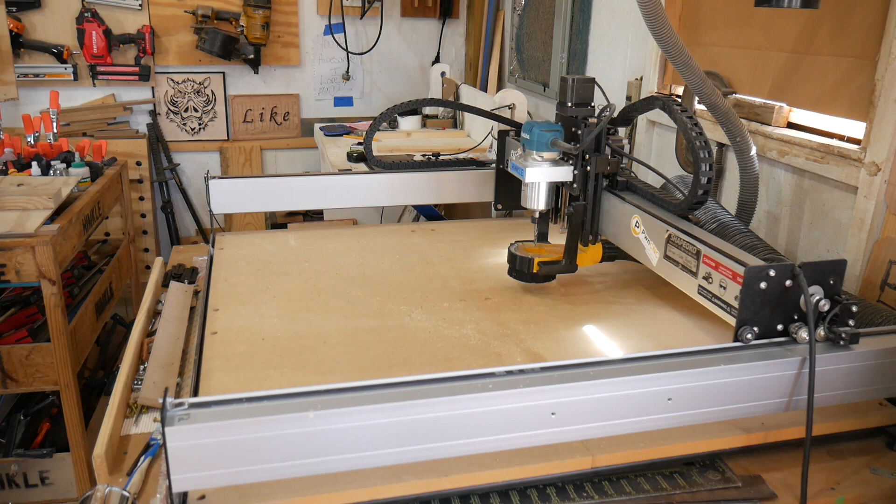Okay, so as you can see, step one is complete. We've got the old one off. Now, there's something that I want to point out here. I don't know if the camera will allow you to see this or not. I hope it will, but right here is a raised portion where I have run a screw through to hold the stock down during carves. You have to remove those.

You can remove them easily with a knife sometimes. Cut them off like so. Maybe take a sander to it. You cannot have any of those little dimples sticking up like that, or it will mess up the replacement of your board. Everything will be cattywampus, and we don't want that. So next step is to go through and make sure that we have no raised portions anywhere on this. I guess we'd call this a primary wasteboard. The one on the top we would call a secondary. Maybe this would be secondary, the one on the top would be primary. Regardless, remove those dimples.

All the nubs are gone now. It's nice and smooth. And one thing I should have mentioned in the beginning, for safety's sake, remove the power from your CNC. You'd hate to have that router come on while you're working for some strange reason. Some of you all have things hooked into your computer where it turns the router on and off. We don't want that thing coming on inadvertently while you got your hands under here doing things. So for safety's sake, remove the power. Let's continue.

Flipping it over so that the feathers are facing the right way.

So here's where the magic happens. We go to the local hardware store and we get ourselves some Johnnie bolts. These are toilet flange bolts that work just like T-slot bolts, but we need a T-slot to put them in. So the way we create that T-slot is we take our MDF slabs that we just cut. We're going to put them behind the blade vertically, like so. We're going to adjust the fence over so that the width of the blade is being removed off the back side of your slab.

Now, your T-nut will be underneath the board, like so. Actually, it'll be like this, and that will create the channel that you will use to clamp down your stock with. So the depth of cut on your blade only needs to be this much, but we'll give it just a little bit more so that we know there'll be no binding when we go to slide the T-nut down through. Edge of the threads to the edge of the nut.

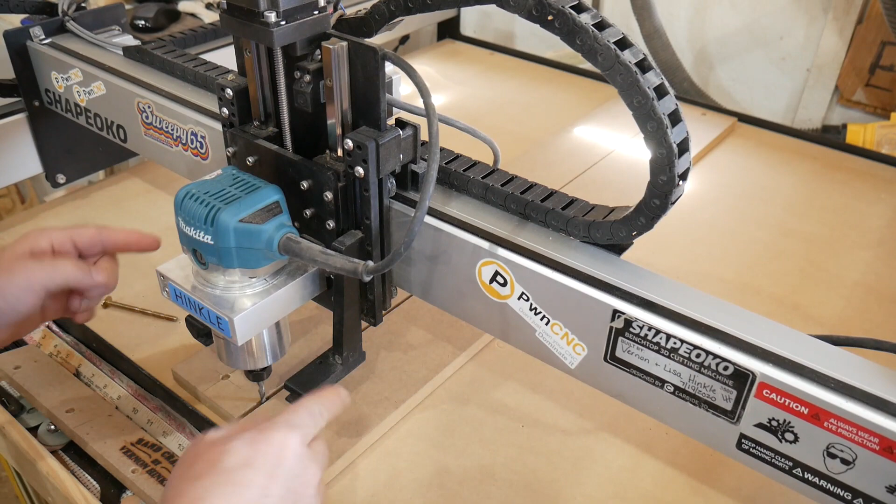We just take each one of these slats now and bump them up against the bit. Closing it on the other end down there, bumping it here, putting in our 1/2 inch spacer, making sure that everything is touching, bumped up against here. We're going to slowly run the machine back, and we're going to keep these guys in place. Realistically, we could put a screw in here to hold it. On each side.

Just like that. We can now remove this out of the way, and we can slowly roll that thing back. And what it's going to do is it's going to create a perfect gap as it rolls through. It's going to push the boards apart to the desired width. And I'm going to go all the way to the back, making sure that I keep this tight up against that bit. And that is as far as the machine will allow. But as you can see, we now have a perfect groove to run your bolt down through. Should put the screws in before you do that though, obviously.

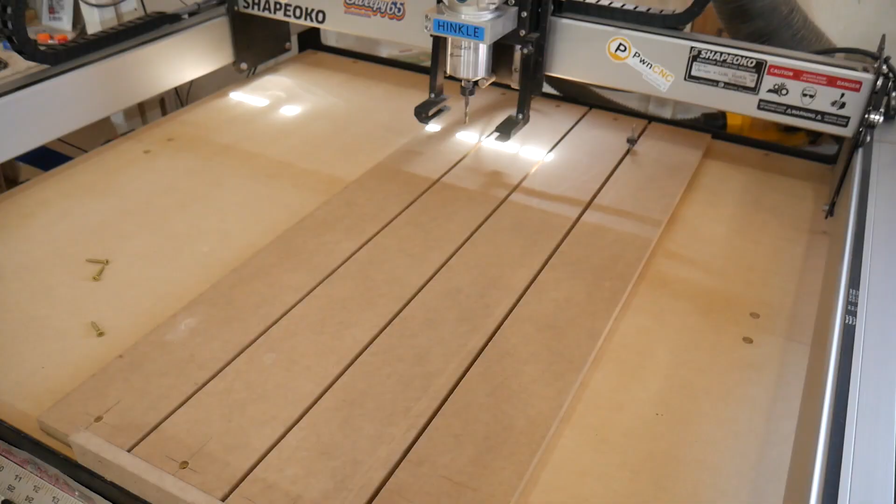Okay, so there's an opportunity here for me to show you a feature within Carveco that'll help you do this. We said that we wanted to put some screw holes in the center of those slats. Let me show you the easiest way to do that with the machine. So open up Carveco, go to New Model, the width of the slats. You measure the slats on your machine. Yours may be different, so you'll need to measure the width. In my case, it's 34. The height is 38. I'm working in inches.

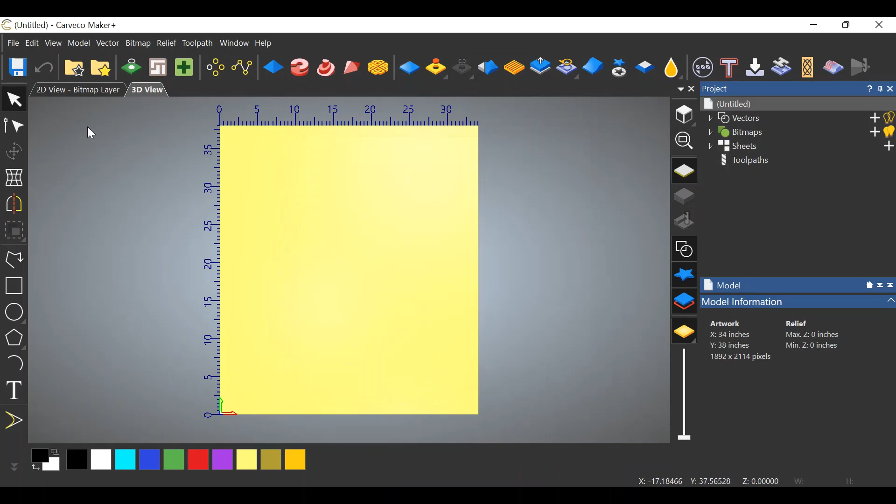I'm putting the origin on the bottom left for now. I'm going to change that to the middle of this carve after I make some measurements. Click OK. And we've got our work area. Now we're going to switch to the 2D view. And the reason that I'm using the origin down here, although we won't be able to do that out in the shop because your wasteboard is greater than the capacity of your machine to reach, is because I want this number scale on the side to be 0 along the bottom for easy peasy lemon squeezy math here in just a moment.

Let's begin with a rectangle. We're going to draw a rectangle that is the size of your slats. The width was 4 inches. The height is 38.

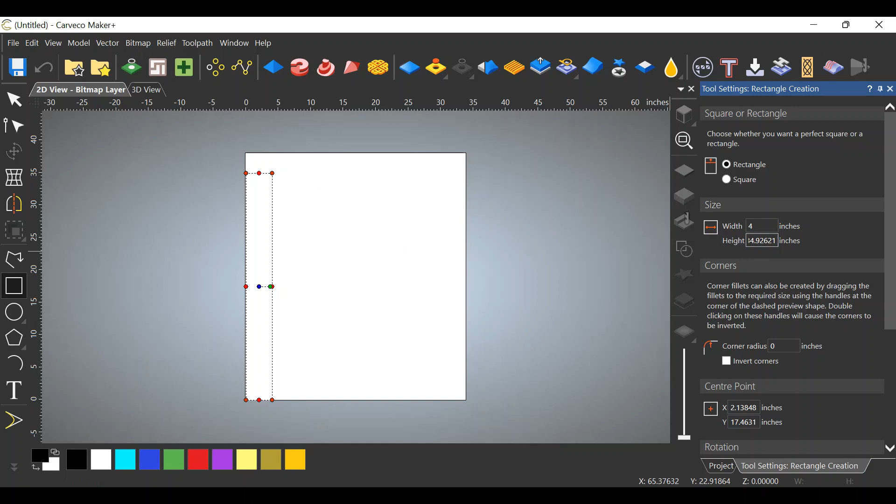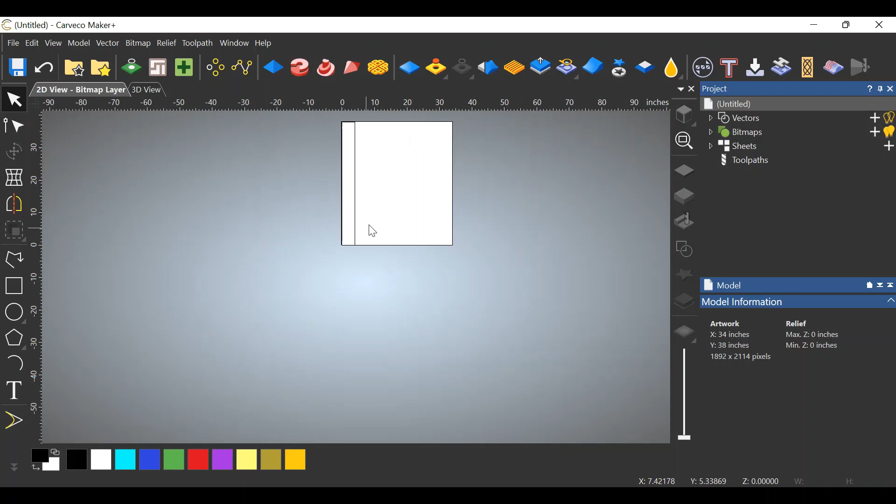Scroll down, click Create. Go back to the arrow, grab the corner of your box, slide it up so that it matches the corner of your work area. When you have it right, the crosshair will appear. As you can see, it changes to a crosshair, release the button. You have it in the right position now. Click off of the rectangle. Let's get him back in the middle so you can see a little bit better what I'm doing here.

Now we're going to put grid lines on here to locate the holes that we want to drill in this piece. The way you do that is to come up into the top bar here, left click and drag down, and you can pull a grid line down. As we move over here to the left, you can see the numbers that I'm going to use to locate this hole. Now we know the first hole was 1 inch off of the bottom. I want the next hole 13 inches further inward.

So if you scroll in just a little bit, you'll see that these numbers are changing. They become more accurate. Don't worry about the box over here. We can get that back. Hover over the grid line, left click, and slide it up until it's over the number you desire. And in this case, I want 13. Scroll back out. As you can see, we're still good. We still have the box over here.

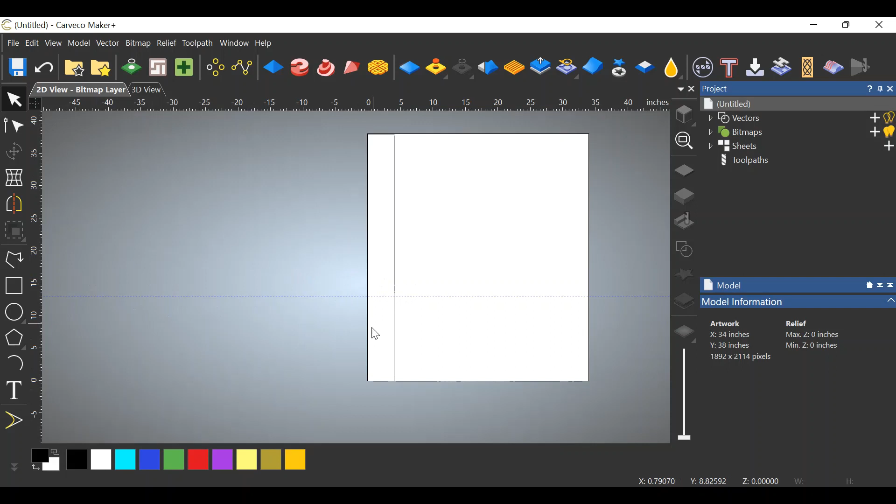Now the next one goes in at 25. So we go to the top, left click, drag down, and we line the grid line up with number 25 on the side. You can zoom in incredibly close, and you can see that we're off, and you can continue to move that grid line to a more precise location, to the 25, scrolling back out, back to the 13, and you can continue that until you are happy with where the location is. All right, I'm good with that.

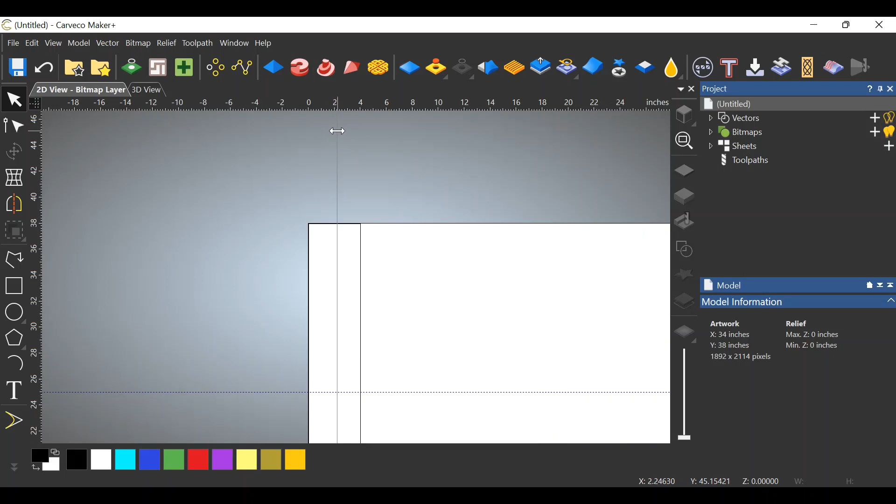Scrolling back over here. Now I need a center line to create a crosshair to the center of this board. So we'll be on the left side. We'll left click, drag the grid over. We know that the board is 4 inches wide. Half of 4 is 2. Scrolling in until I can see the 2 on the top. Again, hovering over the grid, drag to the left until we have it on the 2 and release. Now, as you zoom into your box, you can see that you have the crosshairs to tell you where you want to put your holes.

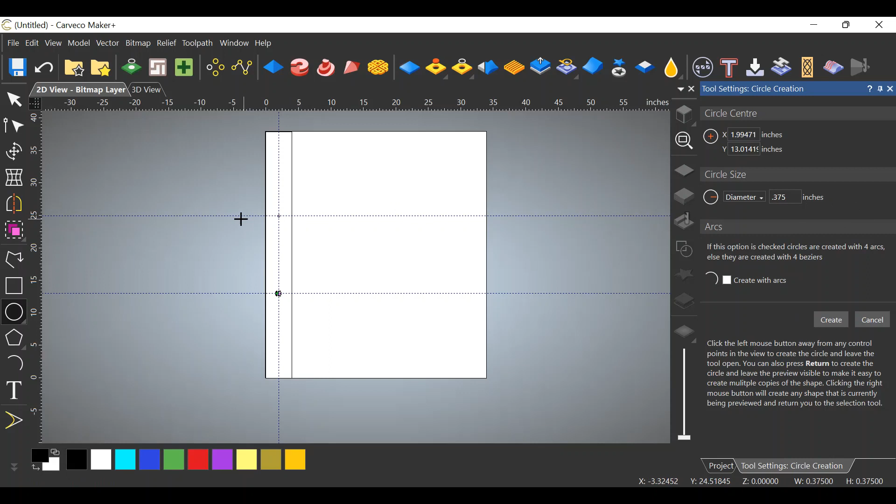Go to the circle tool, hover over the grid lines, left click, drag out. The hole that I need is 3/8 of an inch, so over here in diameter, we're going to change that measurement to 0.375. Click create. We need to do it again right here for the second hole. Change it to 0.375. Click create, and then back over to the arrow tool. And we have our circles. Now we don't need these grid lines any longer, so we can get rid of those by going to View and delete all guidelines. They are now gone.

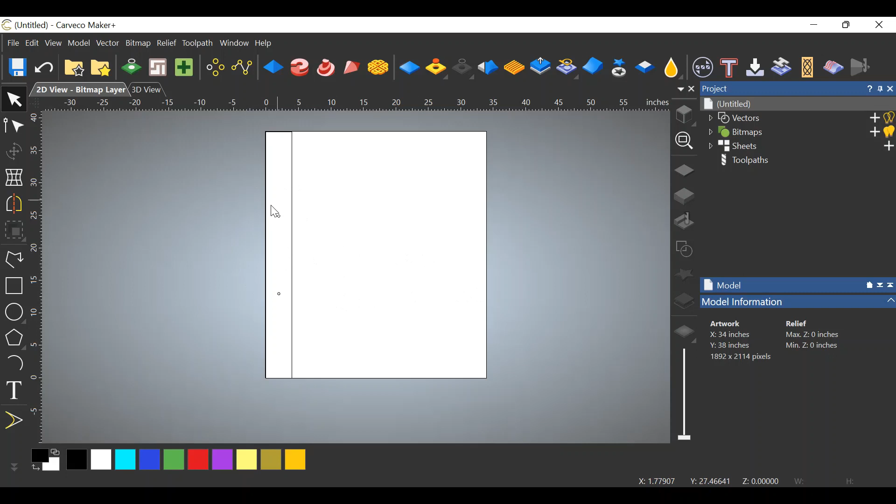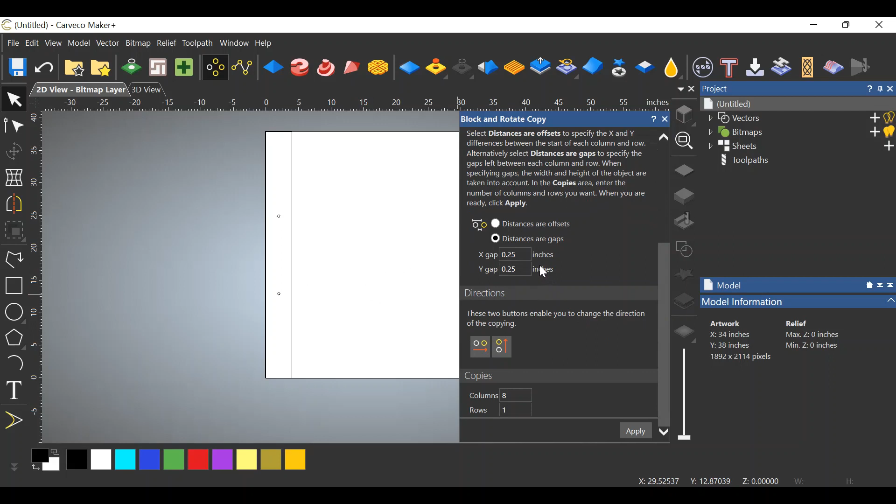So here comes a trick that makes this much easier than redoing that all over again to go across your board. Go up here to these 4 circles, block and rotate copy. Click that. You want to block and copy. Scroll down. You want a gap of 1/4 inch because we spaced those boards 1/4 of an inch apart as they went across the bed of our table. Scrolling down, we want, in my case, 8 columns because I have 8 boards. We only want 1 row. I don't need to double stack or triple stack these. Now I'm going to click apply and you're going to see magic happen.

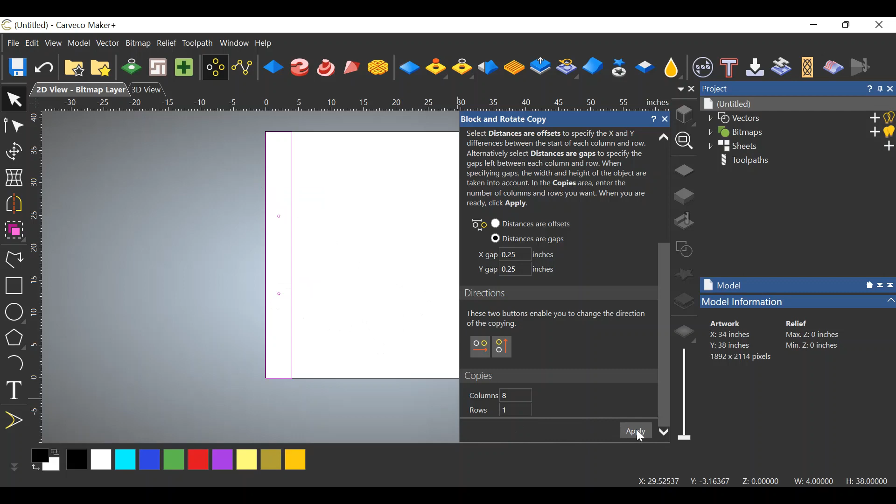You will see magic happen if you select what you want to block and copy. Let's try that again. Now we'll see magic. Close this out. And as you can see, we now have 8 slats with all the holes in the proper orientation. While this is highlighted, hit F9 to ensure that the whole thing is in the middle where it belongs.

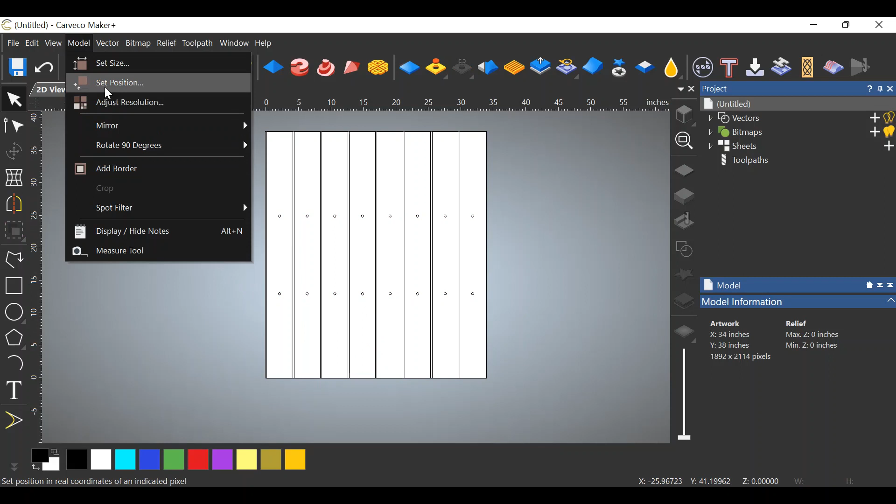We're going to click off of this, and now you want to go to Model, Set Size, and here's where I'm going to change the origin. I want the origin back in the middle. You won't be able to line up your machine here on the bottom left because your router bit will not reach that corner. At least it won't in the case of a Shapeoko. So if we move the origin to the center, click OK. Now the origin is in the middle. How do I prove it? I go to 3D view up here on the top, and I have the origin turned on so I can see that it is there. Let's go back to the 2D view.

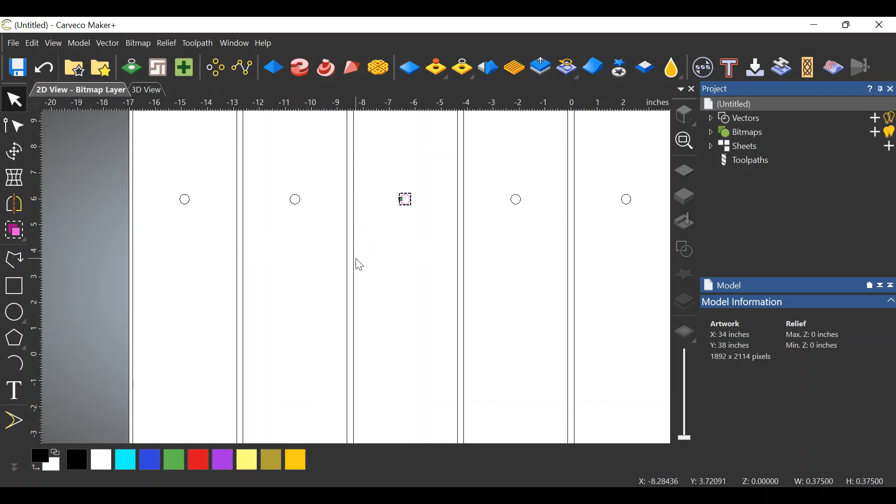Now we've got to go through each of these images and ensure that they are not grouped together. We need these holes to be all grouped together, but we don't want the boxes grouped together. It appears that we are good because as I click on these, I don't see the boxes lighting up, so we're in good shape there.

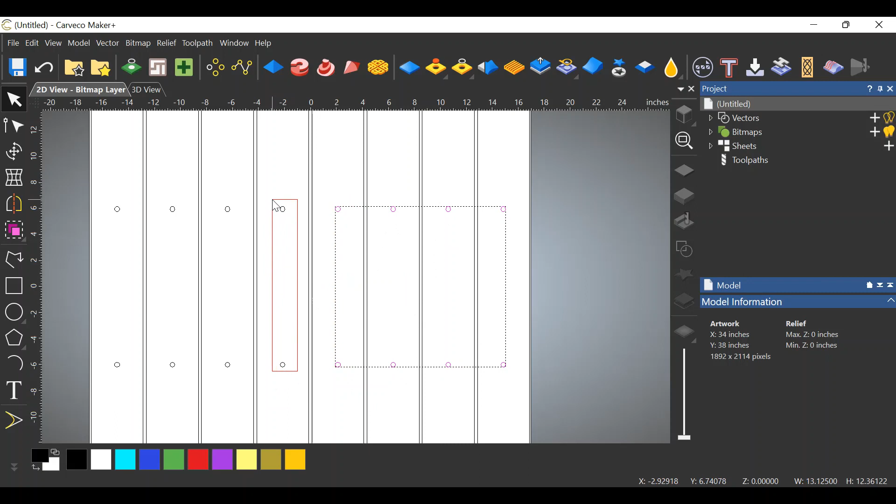Now what we're going to do is we have this one highlighted. We're going to push down on the Shift key, and we're going to scroll up and select those two. Continue to hold the Shift key. Go to the next side, left click, drag, and go up. And we're going to do this all the way across the boards. And once we have them all lit, we're going to group these together so that we don't have to do this again when we do the tool paths.

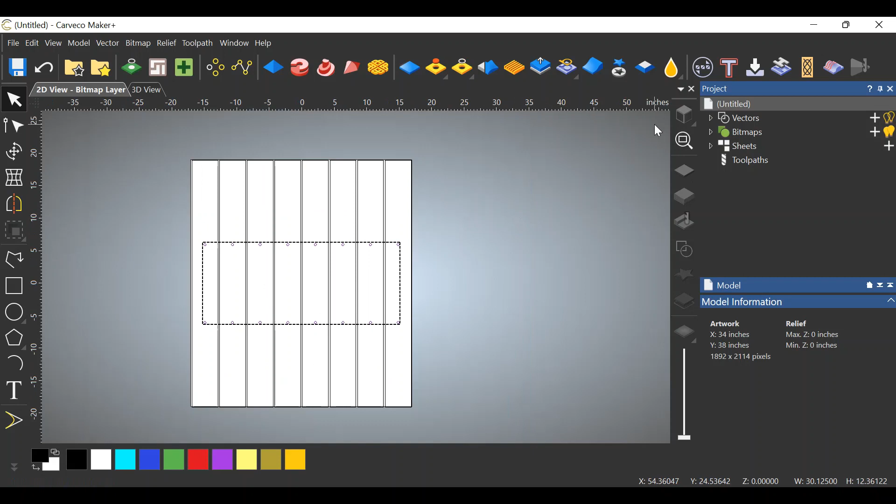Okay, we have them all lit. Release the Shift key, click on group, and as you can see, they're now grouped. So when we click on this, they light up. The tool path is just like any other tool path. This will be an area clearance. Click on tool paths, scroll down,

create area clearance tool path, start depth 0, finish depth is however deep you want the heads of those screws to land. In my case, I wanted them half the thickness of a 3/4 inch piece of MDF. That again is 3/8, so 0.375 goes in here, 0.375. You have to click on it, 0.375. And we're going to grab a tool. We want a 1/4 inch end mill, because with a flat end mill you want a flat bottom on the bottom of those holes.

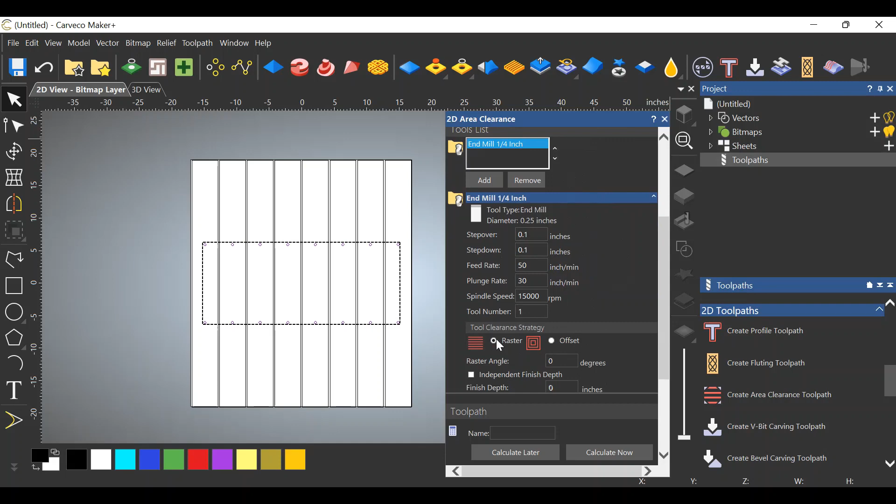Click it once more. Actually, we don't need to. We can scroll down and change the settings I want here. I would change this to 50 inches per minute, change it to an offset tool movement, define the material, 3/4 inch MDF, click OK, give it a name, we'll call it holes. Calculate now, and as you can see, we're going to punch some holes that are not all the way through these boards. And that's all there is to it.

You all know how to save tool paths. If you don't, I've got several videos that you can go back through to learn how to do that. But let's go back out to the shop now, and we'll punch these holes in the top of these boards and continue with this fancy schmancy wasteboard setup.

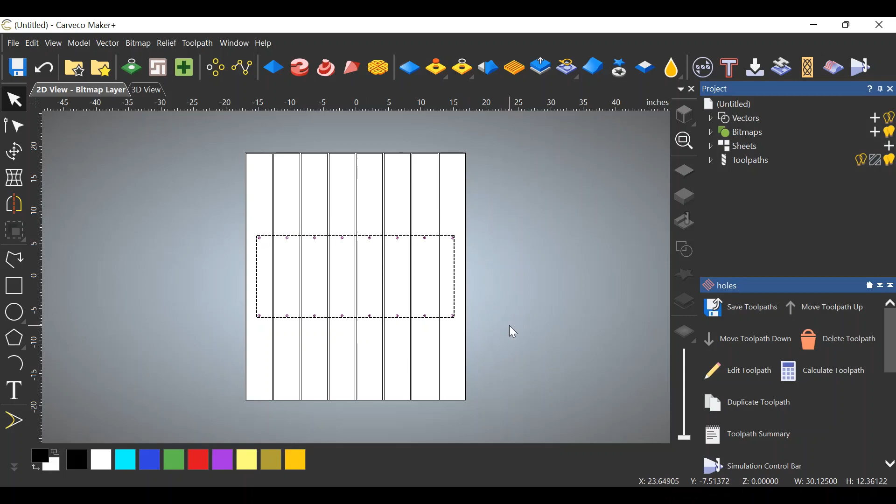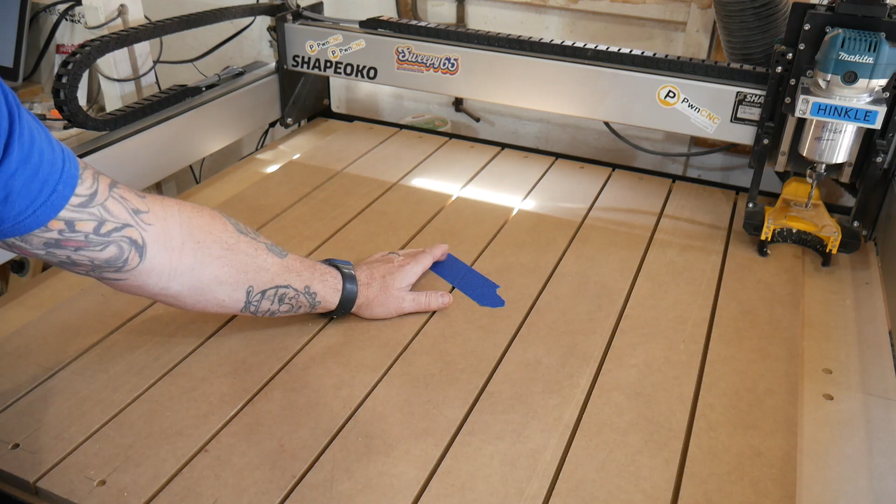Okay, so most of you know I like to work off the center of my projects. I don't have center in this case. Here's another little trick. Put a piece of blue tape down, then you can write your X on the blue tape. I've already gone ahead and zeroed the machine to the center here. We'll put in these screws.

All right, and let's run one final test. Is this thing flat? It sure looks like it to me. All right, everybody, there you have it. A track system wasteboard for the CNC. It's going to be awesome. It's going to help me out a ton.

Now, some of the features with this thing, some of the advantages to this, is unlimited clamping. I can clamp in any position I need to. I can now have a mobile fence. Instead of having it screwed to the deck, I can move it back, twist it, put it in any position I like. I've got to get some more of these black knobs off the jungle store. I've only got some wing nuts here for now, but this is an incredible upgrade to the Shapeoko here. I highly recommend you all do that.